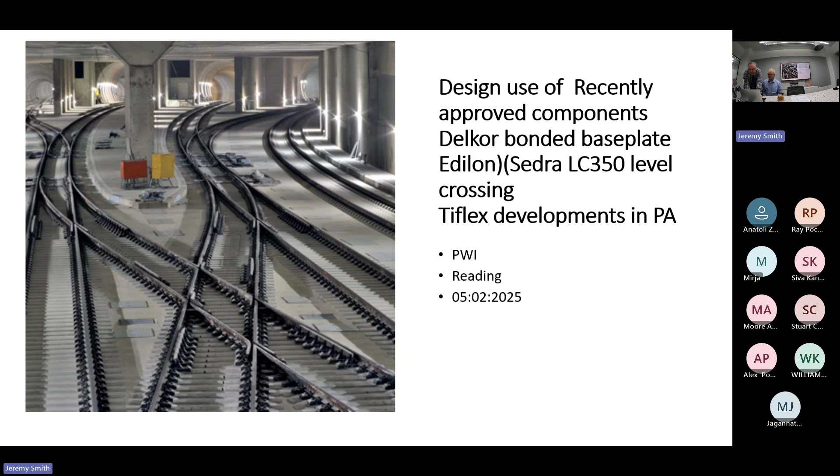What is going on? I'm running from there. We just won't move on. What the devil's happened here?

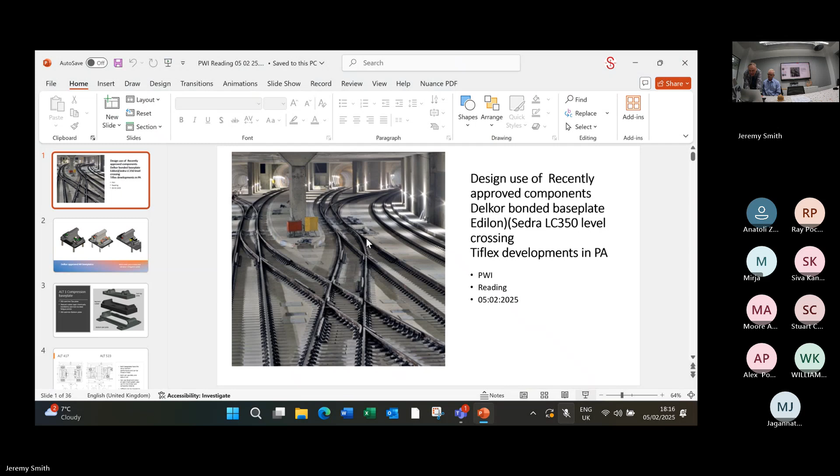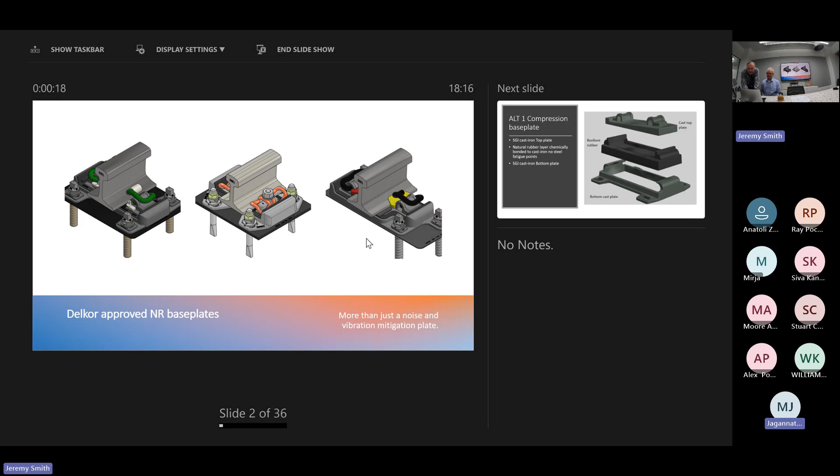Good, right. We're leaving it like that on that one, are we? Sorry? Is that going out like that? Jeremy, select the display settings on the top. You should be able to see duplicate slideshow. Yeah. We both see the same thing now. Yeah. Oh, thank you, well done. Thank you for that, cheers. No worries.

Right, for my pains I got dragged into getting Delkor approved on Network Rail, which I've managed to get 4 base plates through, one on the bullet version, so I'm not going to talk about that too much, but there is one available out there if you need it.

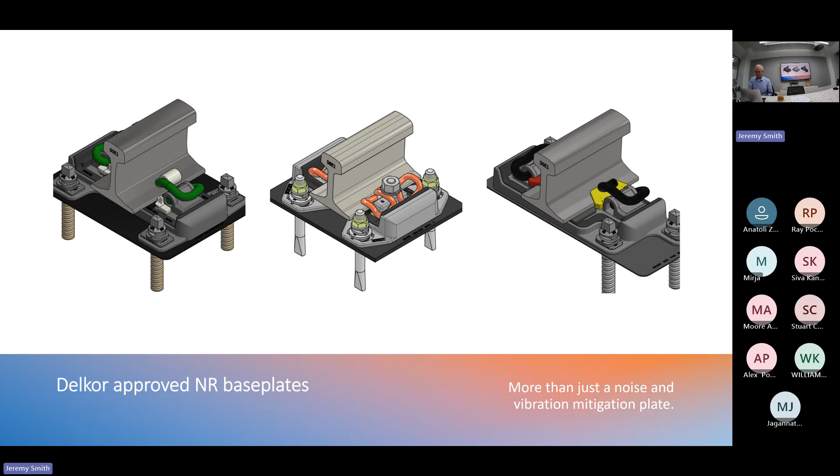So there's 3 types here which we've got in: one for sleepers, one for long timbers, and one for slab track. I'll eventually go through them as we go. There are 2 types of base plates.

The one I'll talk about mainly is the ALT 1 compression plate. I've got a slide on the high attenuation one which I'll explain later. But basically the principle of these things is you've got 2 bits of cast iron - the cast top plate and the bottom cast plate. They're put into a jig, and then high injection rubber at a design resilience is pumped into the system, and they're chemically bonded together. So effectively you've got the same as a bridge bearing seal on those, very durable.

I think LU have managed to break a couple, but apart from that, there were a few issues which compounded the forces it was seeing. Let me put it that way.

So these have been around for probably 25-30 years. Been used extensively in Asia because of the patent issue in Europe. I was instigated to bring them over into LU when we had the track form issues. I think they've been in LU probably 10 years now. There's about 18 kilometres of these in track of various forms, apart from a couple of check curves. Automatic train operations has caused a few problems, but apart from that, they're all performing really well.

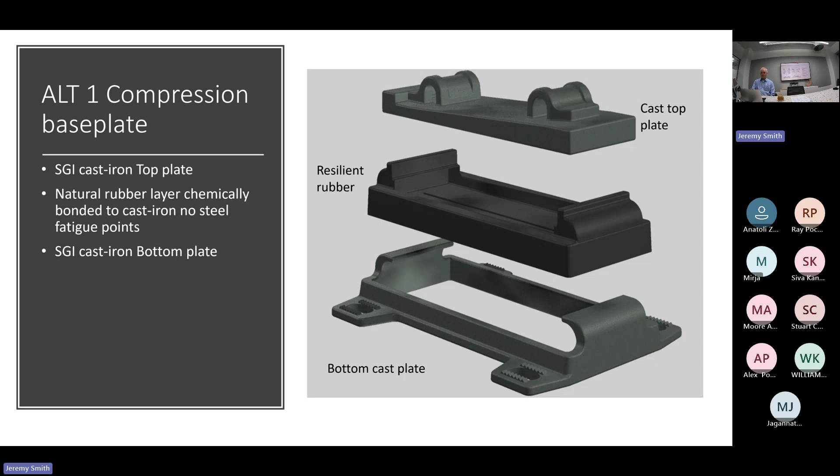They work up to 125 miles an hour. We've had them on 40-ton axle loads in Australia, down to light rail, and we engineer the rubber for the operation requirements. The two core plates are basically the 417, which is a slab track one, and the 523 that fits on a sleeper. They're both identical, you can mix and match them. So if you're in slab track and you've got something you need to get round, you can just swap over to the 523. They're dual seat, so you can put 56 or 60 E1/2 rail in. You can fit them on dowel, screw or cast-in bolts, and whatever.

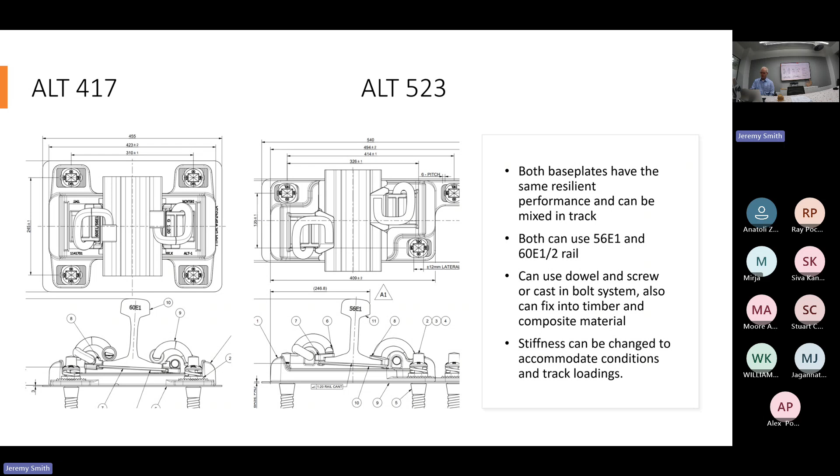So the way we work it is we get the operator's requirements, the loading on the axle, speed, etc., and just make a compound up for what they want. We specify three ranges mainly, which I'll go into, but we can work in between there. It's a computer change in the mixing of the rubber, so it's a no-cost change.

The latest one we've done, because what we found is with long timbers changing to FFU, is that the bending moments on the screw is getting shortened because you've got a lot stiffer medium there. So before in timber, you get a bending moment on the screw, probably about 1.5 inches or so. With the tighter media of the FFU, that has shrunk drastically.

With the FFU lasting longer, what we're starting to see in Asia is failure of bolts at the interface, very slight lateral movement, purely because you're not seeing more movement, but you're seeing more concentrated stresses in a smaller area, and you're also having an item that's lasting a lot longer.

So what we're looking at, we've tried this on LU, and this is on Network Rail where we're doing it. We made this plate especially up for narrowness to try and improve the life. I'll go into lateral resilience, but the lateral resilience takes the forces out, so that damps down the lateral forces. It's been very successful in Singapore and Hong Kong, increasing the life of the assets and reducing maintenance.

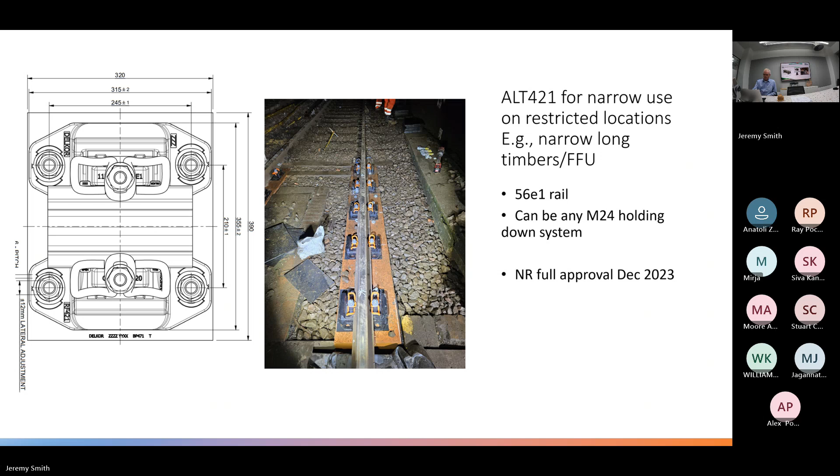Right, I'll briefly touch on the egg. It's used on LU extensively. Network Rail, we've toyed with the idea of putting on Network Rail. The trouble is the egg is a very soft base plate.

The Euro norms do not accommodate testing of soft base plates. When you test a soft resilient fastener, as we did in LU, you have to go back to the old DIN methodology where you put a row of base plates in, because a singular base plate or two together with double loading on there will give so much deflection that, and the speed of the cycles mean that after time it heats up and you end up with very slight tear failures, which, although they're not structurally damaging to the plate, it means they fail straight away.

If you put in a long line and you put an overload situation in there, the rail bends as a beam both laterally and longitudinally, and the forces disperse down the railway system. So this plate will never actually see that peak load from the wheel rail interface.

But at the moment, I'm struggling with getting things through that completely comply with Euro norms, and the thought of going into something that doesn't comply to any Euro norms and taking it through, I'm afraid, as a collective between myself and the suppliers and designers, we've decided that the cost return is not sufficient to take this forward.

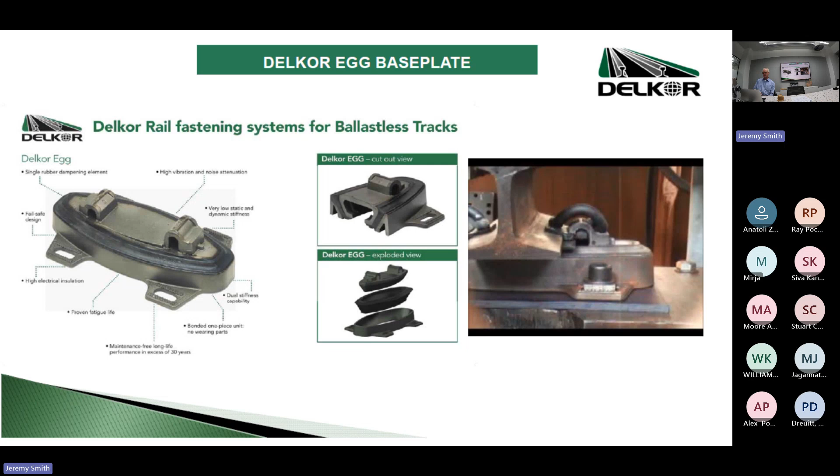Basics, noise and vibration. Resilience, we obviously use. One of our things is noise and vibration. I'm not going to go into it much, but just to give you an idea of how it radiates.

The all resilient systems will look at low frequency vibration. So wheel squeal, etc., they tend not to have a great deal of benefit, but it's a ground-borne noise. So from your tunnels going into the ground, they radiate into the clay, etc., or if there's concrete structures, they radiate through them. They then hit the foundations, go into the building, and the building rooms then act as a microphone, which then sort of spreads the noise, and that's where you get that low rumbling noise.

Planning now has jumped on this after Crossrail because they had a field day, so now it's coming in drastically. We've got to look at noise and vibration on there. Just touched on it because it will keep coming up, and this picture, it just gives you an idea of where we're going.

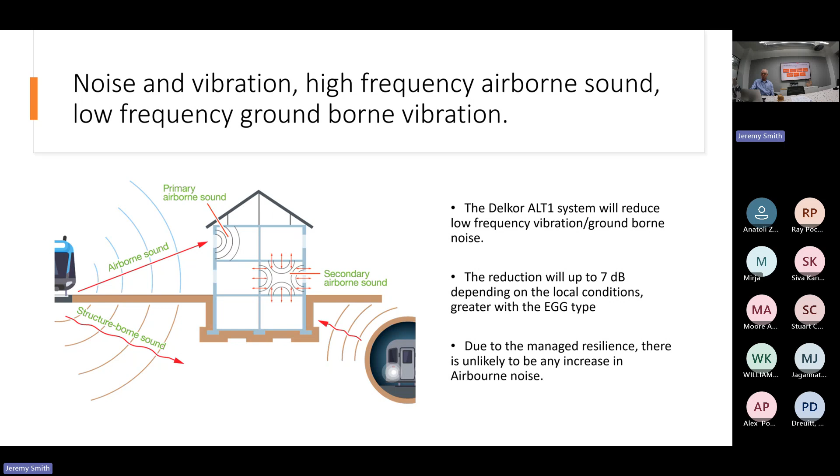Resilience has been something I had a very fast learning curve on. One thing we all tend to get trapped into is thinking that resilience is managing the forces vertically. It's not. It doesn't work unless you laterally get your resilience as well.

A stiff lateral track will cause more damage on curves than anything. The combination of having soft in one direction and stiff in the other is a disaster where you get any minor flange contact. And I've got the scars to prove it.

So all the systems, if you've got a toolbox of items, and if you're on curves, you need to make sure you understand how your lateral forces perform and how you're going to manage that. Without that, there's been some very classic places where there are major issues.

I won't mention any names in case somebody calls me over the coals. We've always treated lateral as a minor thing.

The other thing is we're great for putting down pads, and then you get a bolt on there and somebody on a jackhammer tightens it down, squashes the resilience out of it completely. So the resilience does nothing. By the time you get to the resilient area, you've squeezed the first half of the life out of it, and then it can't do anything.

Even if it's set up properly, you don't get that same effect, because having no preload on a system when a train comes to it, the initial vibration hits it and it absorbs straight away rather than going into it.

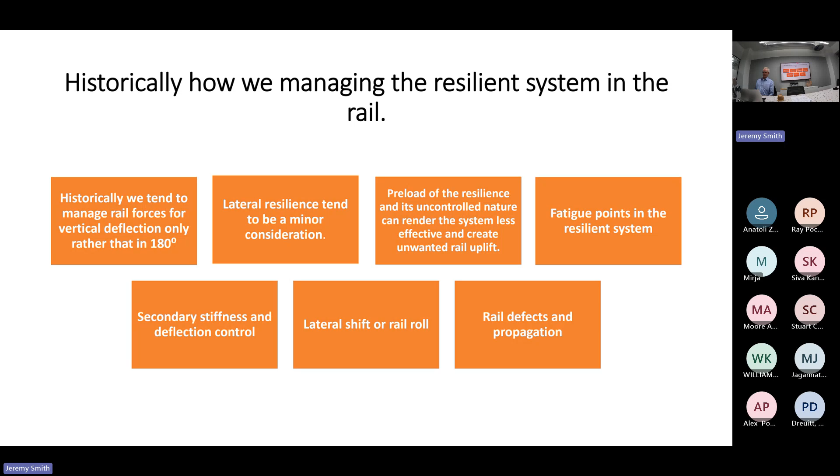That one is a minefield. We're well behind on resilient platforms. Some behave a lot better than others, and I will touch on it later.

These are the classic issues. This is an extreme issue. On a light rail system, they put the classic setup: a grout pad, a resilient pad, going up into a bolted system, with quite light loads, about 8 to 10 ton loads.

Over time, the bolt has started to rattle. It's fatigued on top, started to break the grout pad up, and the bolts are starting to break. So you've also got fatigue in the clip, and the whole track form is basically going. That will unzip as you go along, so once you've got a weak spot, it will just slowly go down.

So is that a rigid grout? There's a grout pad, and then in the middle, between there and there, there was a 20 mil soft pad. On the DLR, all the track forms of this type are on the danger list now for replacement, and it's not an old system.

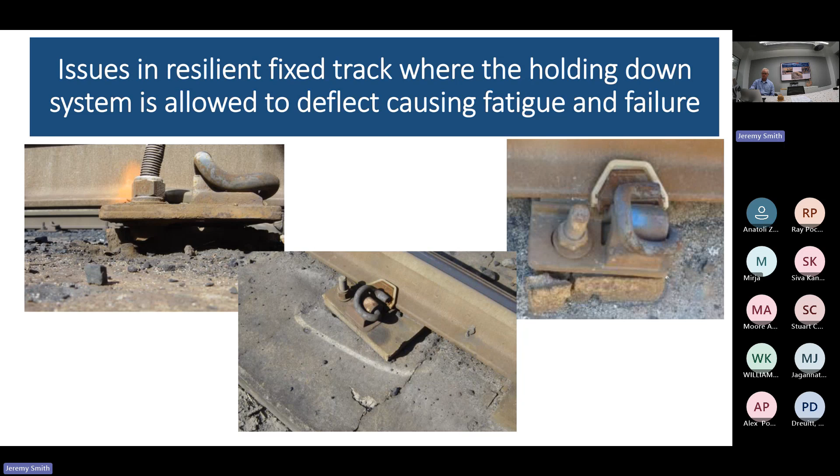Just to give you some idea of noise and vibration performance, it's one of these things that's a black art, cutting it down to basics. I'm not going to say these are absolute figures, but it obviously depends on the ground-carrying conditions.

A direct fixation, which is a cast iron plate on concrete, you're looking at 3 or 4 dB. Embedded rail, that's your Edilon type thing, typical tramway system, that's 6 dB.

Resilient casting base plates, that's the ALT1, up to about 10 dB. Booted system, the LVT, up to about 10, but that on curves doesn't quite work as well. The egg system, which I talked about earlier, I've got down to about 18, but nominally looking at 14 is what we say is a maximum.

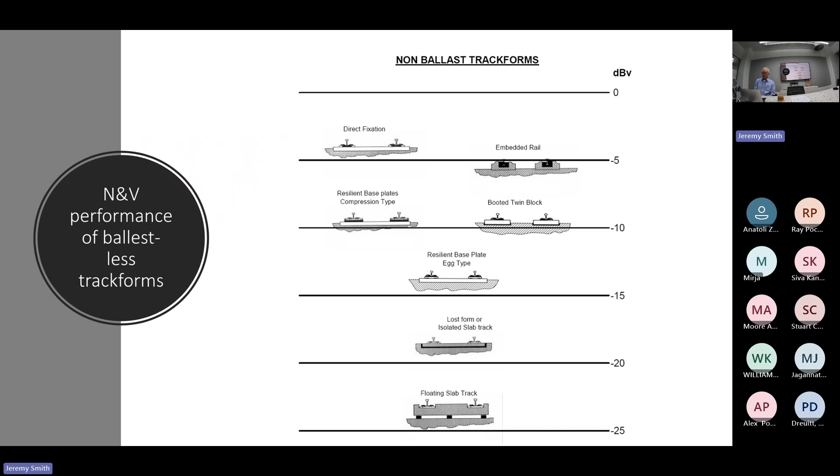And then you go onto your floating slab track, so effectively a ballast mat under, you're getting down to 20, and then full floating slab track you get about 25. So really the Delkor egg is probably the best you're going to get without going to expensive floating slab track, and then you've got the LBT and the Delkor alt 1 following on behind. With technology we're fine tuning that and getting improvements, but for a basic rule of thumb, that's about where we are.

So this is the ALT1. The graph is showing rail deflection. The blue line is static, the green line is dynamic, and the red is fault mode - effectively an overload situation, so that's the maximum it will be. I forgot to put the scales in, but the maximum deflection on this one is 3 millimeters. This is what you'd typically see for a 17.5 ton axle load at 125 mile an hour, so it's quite an onerous input.

Personally, I don't like deflection going above 3 millimeters - I think we're getting into dangerous territory after that. Everything in the UK, I specify that 3 mil is the maximum, because you can get secondary oscillation if you're not careful.

On the left-hand side shows you the dB reductions we're getting for that train at that speed. So you can see when we get down to 80 to 100 Hz, we're getting a significant reduction in ground-borne vibration. And once you get above 50 or 60, you're starting to get into the zone where the wavelength doesn't affect the ground, so it's getting more enjoyable and stuff.

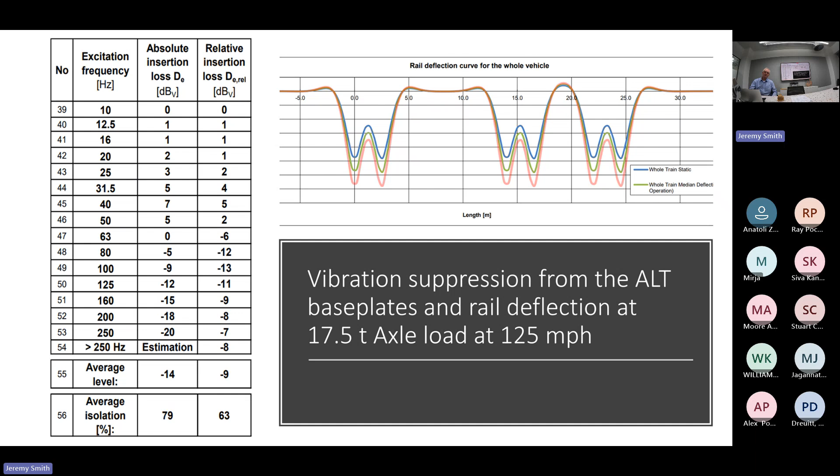So all these lovely old pictures from years ago, you used to see a heavy loco with a bow wave in front - you don't get that scenario. If you go back to the previous slide, you can see the uplift is probably about 0.01 of a millimeter, which is effectively the uplift caused by the weight of the rail resting on the pad.

So that is laterally as well - effectively, the whole rail bends, so the rail deflection length is increased significantly. The rubber is natural rubber, so it stiffens with age. So as you get towards the end of asset life, you're not going to get this floppy bit of rubber in the chair - it stiffens up, so although it doesn't perform and give you the NV or fatigue reduction in the system, you're not in a case where you're getting into any danger. All you're doing is wearing your asset out quicker.

Everything has been designed to use existing tooling and skills. All the clever bits we do in the factory, so as far as the guys on track are concerned, it's a base plate that screws into something - end of story. We don't want any whizzy stuff down there, we just want it to go on there and they plonk it in.

40 years traffic, high N&V performance. And the other good thing - existing spatially constrained railways, London Underground typically - unless you've got a real, dare I say, pig of a railway, it will fit in most places and work pretty well.

DLR, they're on a night shift, which is 3 hours. They're changing 20 base plates a night, drilling and grouting. So it can be done quite economically as well.

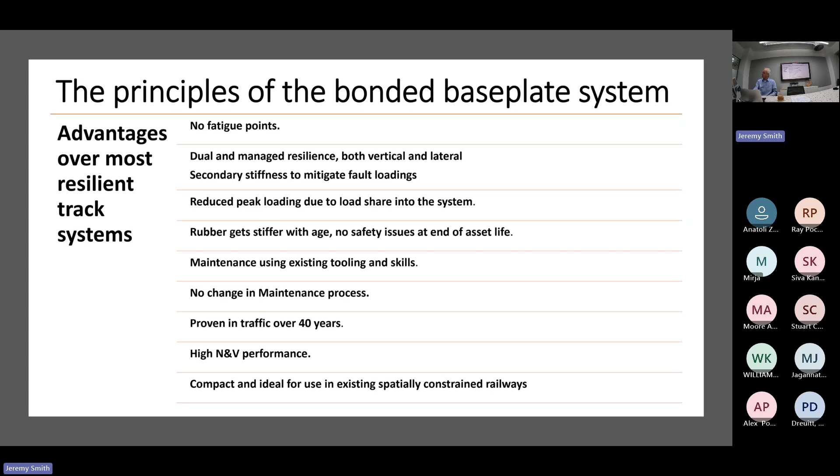Where's that? Is that on the viaduct? Sorry - the viaducts, yeah.

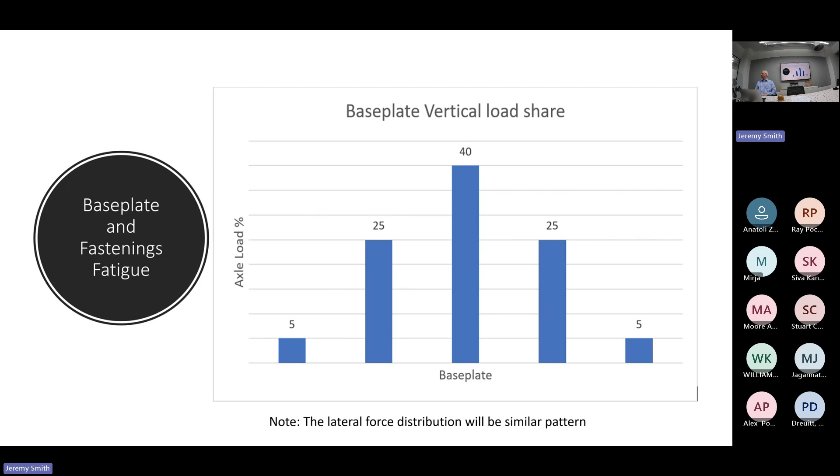Again, this is more of a summary. Vertical forces.

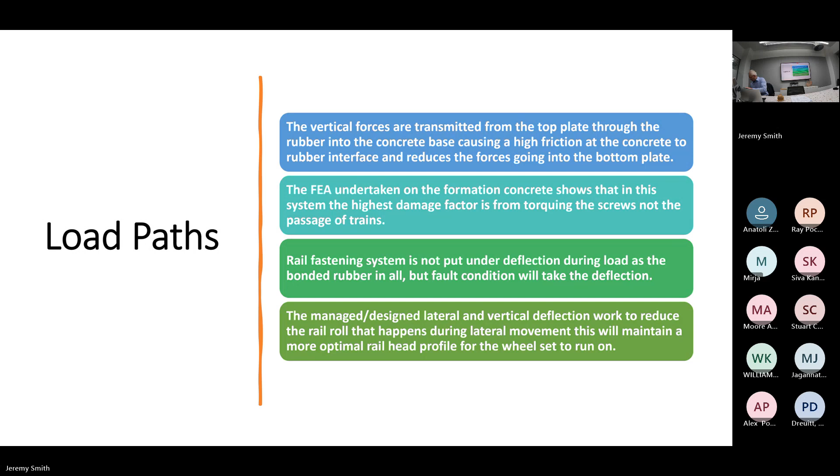Railhead damage. We did some testing on DLR because we've just done a check plate for them with a Delkor, and the vibration reduction on the high frequencies, which tends to cause corrugation and propagation, was slightly reduced over what it was. So we're not going to increase the corrugation. We've had some issues with corrugation on London Underground.

We're still doing major investigation on it, along with the damaged base plates which I mentioned. It does seem to correspond with ATO, ATP, automatic train operation. Although we've got no evidence and we're still working with LU on it, we do feel that probably the total consistency of driving now is a big issue in not breaking the cycle up. Having a driver who drove faster, slower, or stopped slightly before a signal was enough to break that cycle up.

It's something that's ongoing. We had the first track I put in there with the egg, it slowed down the corrugation. And since ATO, ATP, it's now sped up to worse than it was. So it's pointing in that direction, but cards on the table, we're looking into it. Anything we can do to try and reduce that, we will. So we're doing development work, looking to see if we can work with LU to reduce that issue. Everywhere else, touch wood, where it is, we seem to be okay.

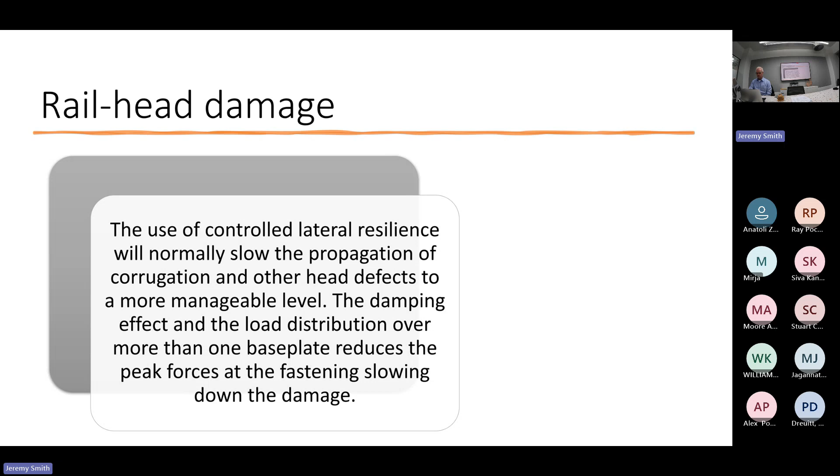Right, going on to other things related to systems design. So, stiffness transitions. Been a bee in my bonnet for donkey's years. Why do we dig a big hole and chuck a massive great lump of concrete in there to stop the formation being pummeled to death? Instead of that, we pummel the ballast to death. Whereas my background in engineering, I've always worked to try and reduce or ease the forces off.

This was done by a colleague of mine, Peter Stronstein, who tried it in Sydney in 2004, effectively running off the slab on resilience. And then you've still got obviously the momentum of the movement of the rail, and then you come off it onto Delcors on the ballast, and then you slowly stiffen up the rubber.

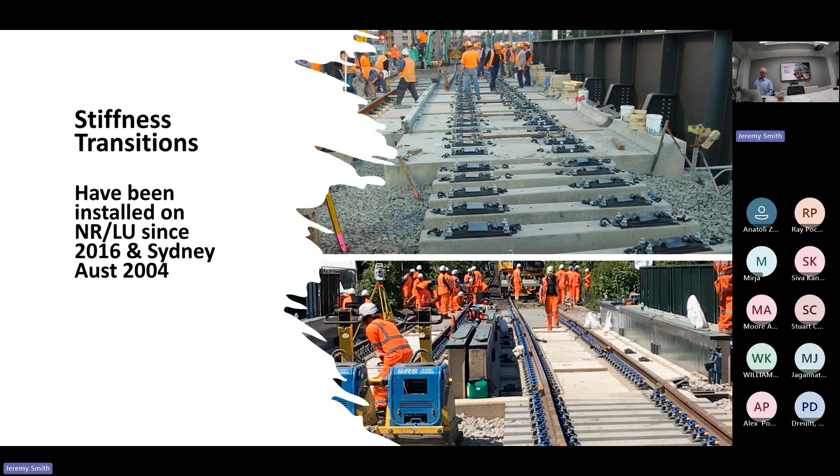As you can see on that bottom one, which I'll show you a bit further, in the dim and distance, you can see the change in the base plates going to green. Well, that's the different stiffness. Hopefully I remember the graphing. This is the first ones we tried, LU, which has become the standard drawing now. So you can see you come off the concrete slab onto the wider sleepers with the Delcors on at spacing, and then halfway down you change to the green ones.

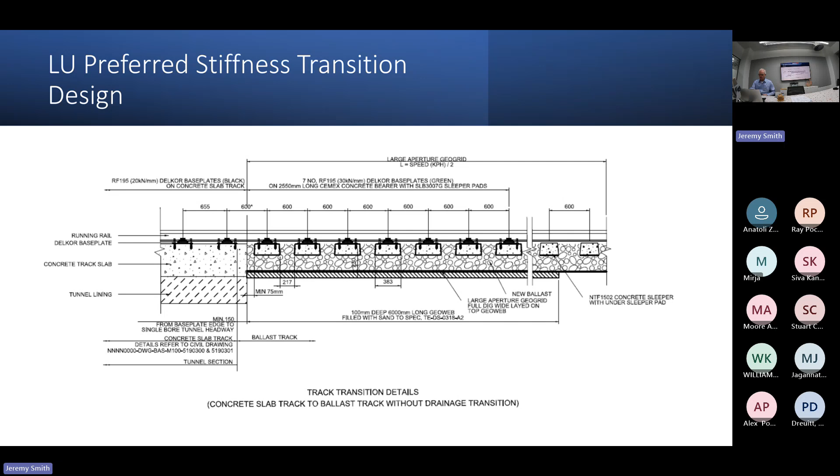Again, we don't have to change every single base plate, because using a rail as a beam means that as the rail bend comes along, it picks up the stiffer one and slowly stiffens the rail up as you go along. So you'll have, say, 10 sleepers interacting with all of them, then it'll be 9, one slightly stiffer, so that makes the rail stiffen up slowly. So rather than having every single one different, you can actually use it by rolling the rail stiffness down along and clipping along. It's a bit of a hard concept to take forward, but I think I've got some graphs further on.

Right, that was just a recap, and I've probably already said all that. The brilliant thing about this is, it's not intrusive works - you haven't got to dig a big hole, you're just putting in bigger sleepers in a different configuration. All the movement is kept out of the ballast. And one thing you've got to remember is that movement, again, is not only force going down, it's lateral movement.

So what we found was that if you did it on something like, you came off a lateral resilient system onto a padded system with a soft pad to do it, what you was getting as you came off was the track would be moving slightly because you'd got lateral resilience in the system. So very slight movement, only 0.2 of a millimetre. That was rolling into contact points at the ballast slightly and just knocking all the cohesive bonding off the ballast. So it's ending up with that critical layer of ballast underneath the sleeper having lost its cohesive bonding, and you ended up with marbles there.

The tamper comes along, hits it, and they spew out everywhere. So by also managing the lateral resilience as you come out, it gives you a way of increasing the ballast life. The aim of this was to make sure that the transition life was equal to or greater than the life of the track it was running into, the ballast track it was running into. So the idea is that we reduce the maintenance interventions completely and reduce the risk of twist errors, etc.

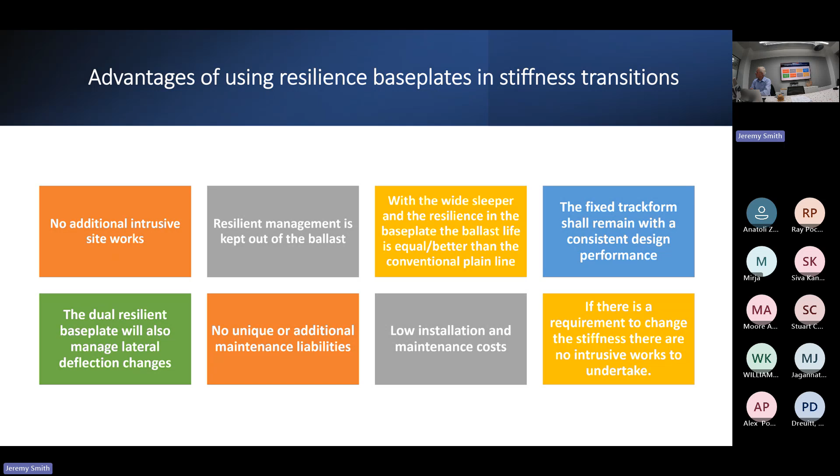Done that one. Low installation costs. So basically, it's the same. You know, if you're coming off the end of a slab, you've got to replace the last panel, so the costs are basically minimal. And potentially, if there's a change in stiffness with the vehicles, you just unbolt and rebolt different ones on.

These are a couple we've done. That's the first one I installed, 9 years ago. That was on the Met line. That hasn't been follow-up tamped. It was supposed to have been done, but never did, and it hadn't moved. That's coming off 20 kilonewtons onto 30 kilonewtons. And the other one is in Kent, on Stour Bridge I think it is. That's 80 mile an hour running, coming off a newly installed concrete bridge. And in the distance, again, you can just see the change.

The network rail one was a test site. We've done a lot of testing on deflection, what it's doing, and it's performing, luckily, as I designed.

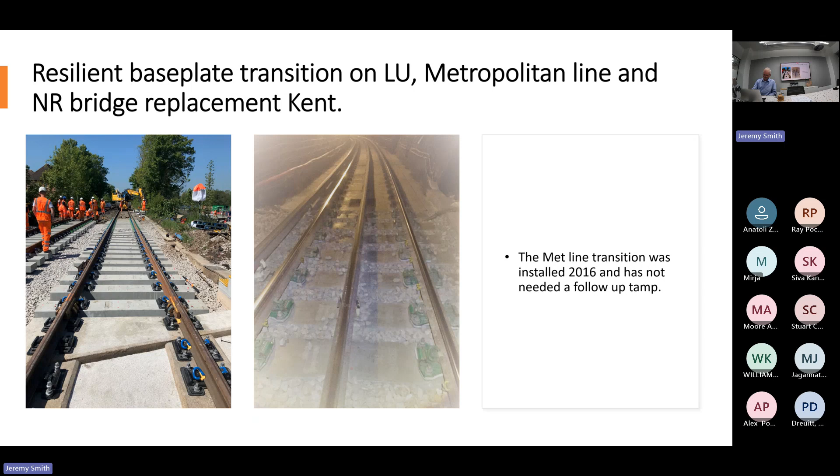Long timbers. I've gone on about FFU and side cut, etc., about the fatigue.

The one on the Sydney Harbour Bridge was done 25 years ago. That was done to try and stop the vibration going into the bridge and upsetting the neighbours at each end. It worked really well - the timbers actually failed before the Delcors did.

There's a major upgrade on rolling stock going on now, so they're replacing the timbers, and that's the only reason they're coming out. The middle one is Norwood Viaduct - that was the first one we tried. It's going onto conventional hardwood. Again, Sussex did some testing on it, and it's performing as required.

And the other one is on FFU. That was done on a heritage railway for testing. I'll show you the video at the end of resilient track form, how it works. I won't stress somebody out at the moment for changing the slides over.

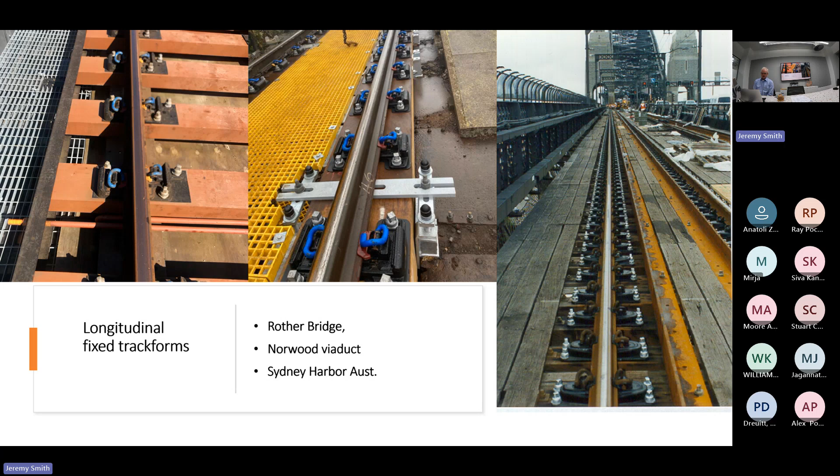Again, that's working really well. I'm trying to get more people interested in using the Delkors with the FFUs, but with the cost restraints going on, the bean counters seem to be stopping a lot of enhancements that would give maintenance a big benefit.

Delkor and FFU is quite a good solution - quite a good solution. In their view, they've done probably 15, 20 bridges, I think. We've done some on Network Rail, we're doing some more, but it's hard work getting the word out there now.

This again is a wrap up of more stuff I've said about the resilience. We went from - in the old days when I first started - using marine softwood long timbers, which was beautiful timber, worked a treat, used to be really forgiving, really good. Then we went to hardwood, and now we've gone to these composite ones, which are brilliant, but how far off we are from putting a lump of concrete in, I don't know.

The newer materials basically have no meaningful resilience. They can engineer it in, but very rarely do they. It's pretty expensive stuff in its own right, and as soon as you start modifying it, the price goes through the roof again. So especially on minor curves etc., you will see lateral failures in about 15 years' time.

I don't know anybody who's been involved with long timbers who hasn't got a sob story about them - how they've failed, how they've had a derailment, how gauge widening panics happened, this, that and the other. It's a very high maintenance liability area, so by putting the resilience in, you reduce that liability.

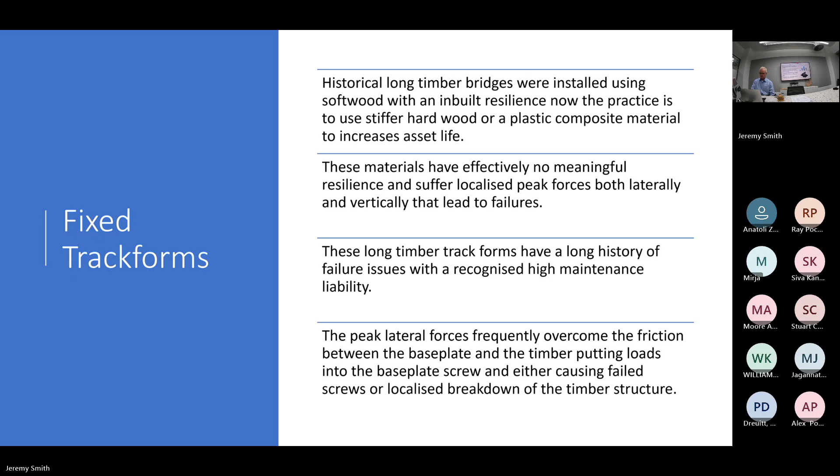This has a great benefit. I've done it quite a lot in the States and Canada, where they've actually taken the timber off, jacked the bridge up, replaced the bearings with grout, and then put a bearing on top. So we've lifted the whole lot up 300 mil, bolted the bolts back onto the existing structure, and gained ourselves 300 mil clearance.

Also with John at the moment, we're working in some areas with flooding - we're putting it on top of the bridge so we can maximise the flood opening in all directions. If you've got the resilience in the system, the timber is always left on there, and FFU is deemed to be a timber replacement. But if you build the resilience into something else, why do you need that timber? Why do you need that extra interface, that extra set of bolts, that extra medium? What benefit is it giving us?

I know it means you've got to work with civils guys - well, I might work with civils guys. What's wrong with that? What's the thickness of the resilience between that base plate and the top of the flange?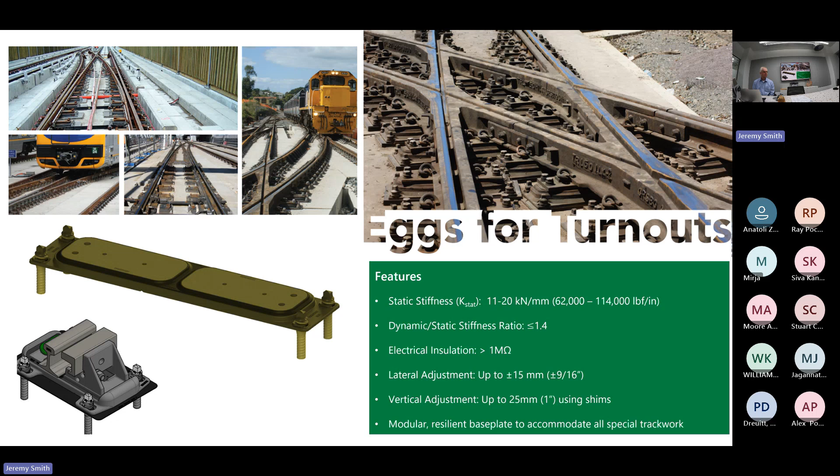Right, we're moving off that for the moment and talking about embedded rail. I got involved in this basically for the approvals. It had been approved for a long time on Network Rail in its old form, which was a massive, great lump of concrete about 550 mil deep. It wasn't viable to put in because you hit services every time. So it was redesigned down to 350 deep, top of concrete to bottom, and went back through the approval process. It got stuck in product approval - the only change was the concrete, performance was identical, and it took 3.5 years to get through. So I dragged it through the last bit.

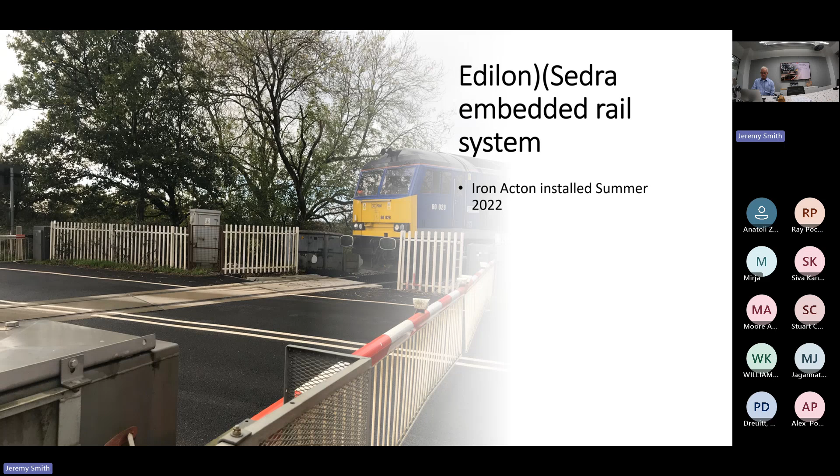So effectively, what you've got is concrete sections - that's the grey bit - and then you've got what is basically a conventional formation underneath it. So you've got type 1 and then a sand binding layer, the reinforced concrete with the rough grip surface on it, and then you bond it in - you can see the rails there are bonded in with a chemically bonded Corkelast. Again, that resilience is built up by user requirements. Here's one I bought earlier.

So effectively, what you've got here is, assume that's concrete edge, you prime the concrete edges, work out your final level, so you're always going to have a level differentiation when you put these in. That's your final. You've got a resilient layer there, that's your inclination, and you put packers in there either way.

It doesn't show up very well, although you can see it on the slide a lot better. You've got Corkelast wedges, which is the same material that you put it in. You've got round the outside these void fillers, which effectively just save the material. That's where your money comes in, is that material.

So they put these fillers in there, and they have a racking system, which means that as you get your final level, you just tap these wedges in, and that gets your correct alignment. As you can see, apart from strategic places where you put these pads in, it's free under there. So you fill up one side, it flows under, back out, levels up, and then you top up to get your level, sets off.

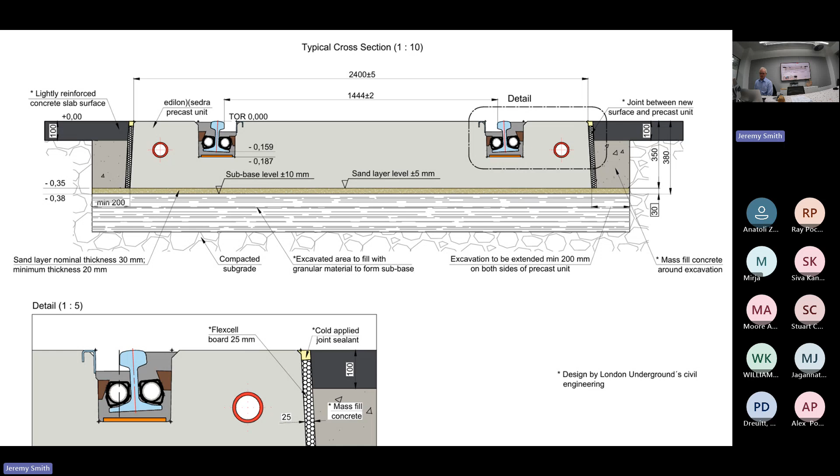I've done a cost benefit analysis of it with Network Rail, using Network Rail figures, but it costs 10% more to put in, but that pays back within the first 2 years.

And again, we put stiffness transitions on this, and we've taken a place at Newhaven, which is a test site where they were going in every 3 months to restore line and level. We haven't touched it since. And that was start of COVID. So it works really well.

So on level crossings, yes, level crossings, and obviously the same principle on things like tramways, but also, you know, we do pits as well, and they're brilliant for pits because you have a cut off down there, so your Corkelast will come along up there. You put a temporary former there on the edge of the pit, so your pit can finish at the edge of the railway. You take all your sharp edges out.

Cleaning is easy, no corrosion issues. Yeah, you get an extra 300 mil on your pit, and you also take away all your knuckle backers. Works really well.

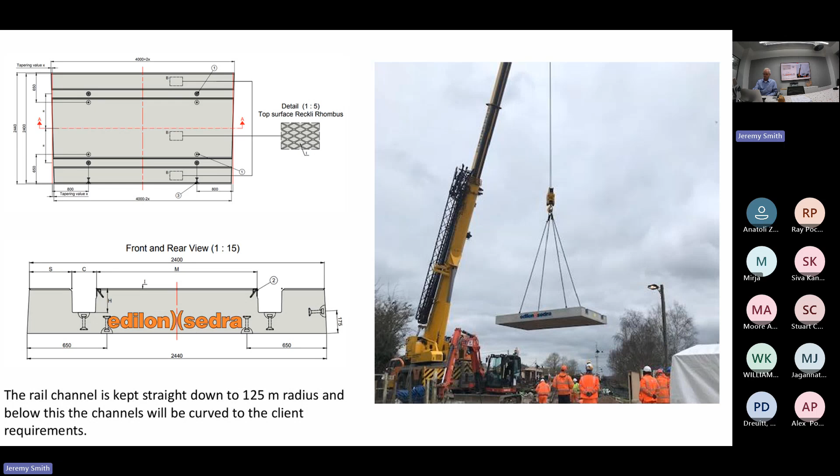So there's a sort of breakdown of it, easier. You can see we've also got it approved for a check rail system. So we've got a tight curve, which again, that project's been delayed about 8 years now, I think, which has got a check rail in it. So we designed a block system so you could embed the check rail around there without a break. Obviously a bit more costly and quite interesting, making sure you get the bolts in the right place when you curve around. But it's doable.

We assume 40-year minimum asset life. That's worst case scenario - it's always road transport that kills it. But basically the stuff that's in Holland, it's on very poor ground conditions, has been in there 40 years and not showing any sign of degradation.

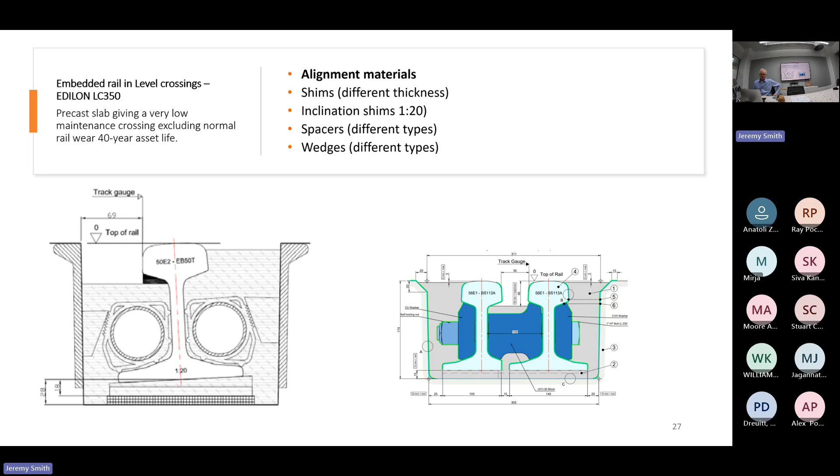Rail replacement, hopefully I'll put a slide in. Yes, I do. Rail replacement is done. As you can see on the base, you've got pad there that is not bonded - so that's not bonded to the concrete. So you've got the big pizza cutter, which you put down the side and then just lift the rail out, clean it all up. You don't have to clean the material off because it will bond to itself quite happily. Just take all the degradation out of it, rebond it back in again, and in you go. So that's a nighttime closure to do it.

What's the curing time? Curing time for works vehicles, depending on temperature, is maximum of 1.5 hours, about 3-4 hours for full line speed. So yeah, it's not an issue because by the time you've repaired any bits and pieces on the road and got your track back, it's fine.

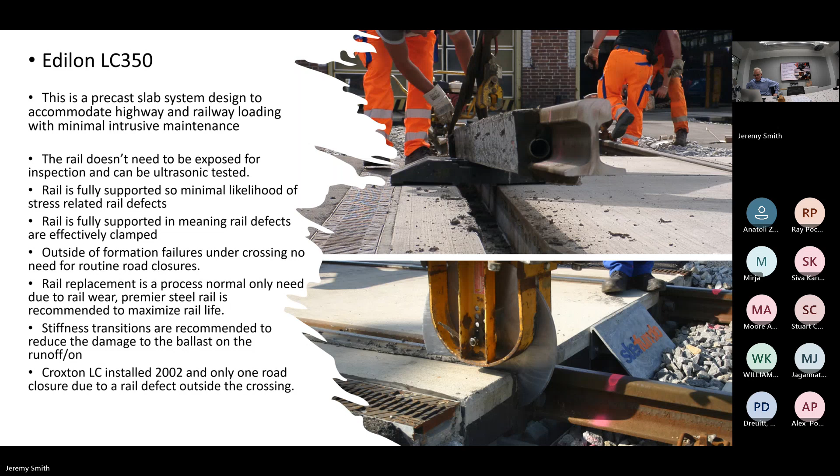The other thing - I'm doing quite a bit of work on the continent where they're doing electrification, etc. We're putting these underneath bridges to save strengthening up the foundation. So if you look on the left-hand side, a conventional ballasted track - assuming your formation is good enough for ballasted track, then effectively you can rip the ballast off, put a binding layer down, set your slabs in, and drop yourself about, let's say, 360 millimeters without any major works. And because you're at bottom of formation level, your drainage, should, if it's effective now, it should remain effective. It's an easy, cheap way of doing it. I wouldn't recommend it for extensive long runs because obviously changing rails is always going to be a liability compared with that. But for small, 20-30 meter bridges that you want to lower under, it's not the end all.

It's not going to be used everywhere, but it's definitely something that I think should be in the toolbox that we can use.

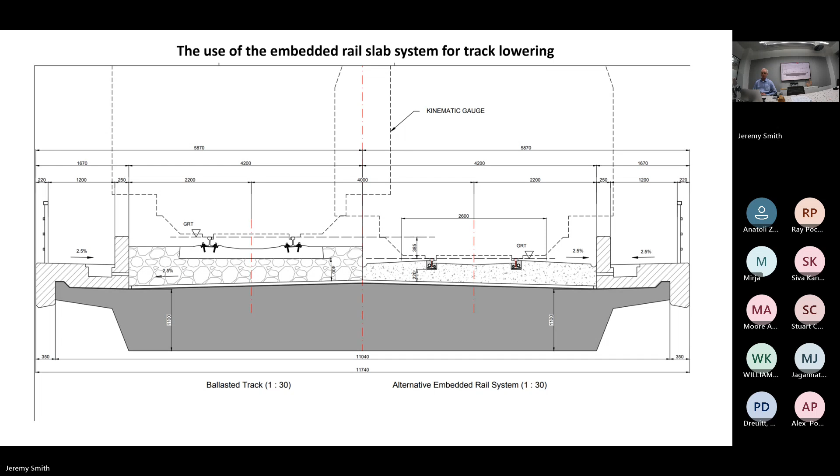And this is where my systems engineering sort of comes in. Luckily, Edilon, Sedra and Tiflex, Delkor, are sister companies who don't get on very well together, and I was brought in by the parent company to try and rattle some knuckles and get them working as a unit.

Every one we put in, nobody's said anything about them. Everything we've gone and tested and revisited afterwards is performing well. So the proof to me is when nobody complains. When somebody complains, you can go and sort it out. When nobody comes back to you, it's generally working. The Newhaven one, the Swineshead one, were done in very poor conditions and they're behaving well.

The crossing itself at Swineshead had a few issues, but that's basically down to ground conditions, and there's still a few hiccups going on there which need to iron out. But the Newhaven one, which again is on marine alluvium, we dug out 500 millimeters of type 1 binding layer, put it in there, and after 2 years of TRC trace, you couldn't notice the difference from day one to the end of it. So it has worked, in those conditions, and the maintainer's made up with it. It just doesn't go back there like he used to.

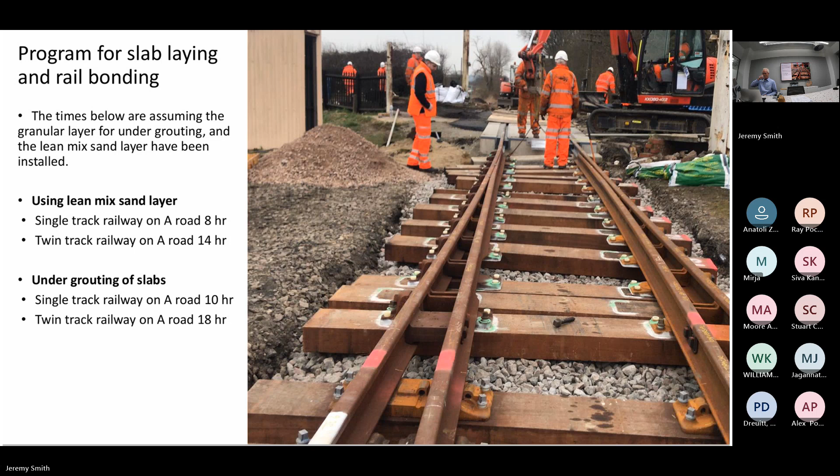I'm also doing some work on high frequency damping. So the classic damper is a big lump of rubber on the outside, generally layered. It tends to sort of try and burn a bit off. It hasn't been that successful.

So there's a guy in Hong Kong, and there's myself and a few other guys who are working on the system. And what we're looking at is making sure that we can take, again, it comes down to this, utilising every direction. The conventional ones, effectively, anything radiating out from the web at 90 degrees can be captured. Anything coming out anywhere else tends not to be. So what you have here is the white bit in the middle is a weight, and then 2 bits on the outside are cartridge. Sandwiched in between there is a layer of polymer, and that polymer is aligned to the weight of the white bit in the middle.

And that then effectively works like white noise. What do you call it? Is it white noise? Where you get 2 amplitudes, oppose them opposite each other, and drive them in. So effectively, you damp it down by burning the energy off, by reversing the amplitude as it goes in there.

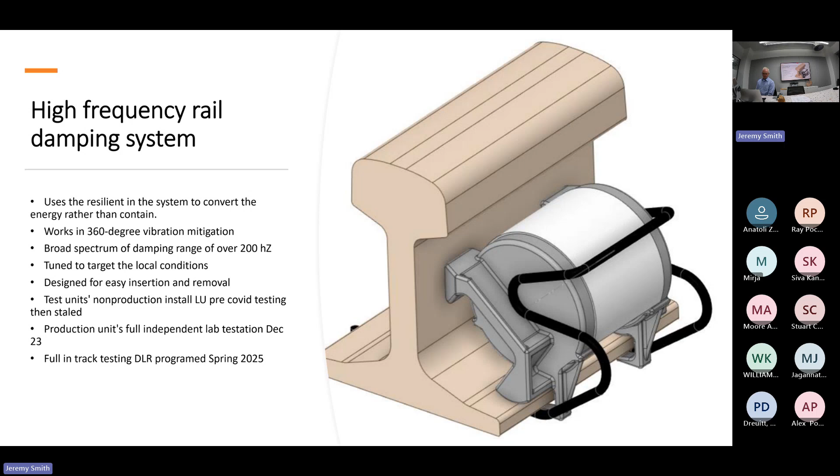We've done all the pre-production testing. It works well. We've got a site going in on DLR, hopefully in April time. This is aimed at high frequency noise. We're aiming in the 200 to 800 hertz mark, which is where corrugation is prevalent. So we're picking a corrugation site to actually monitor the reduction in corrugation. They're easy to fit, as you can see. They're a spring system, clip on really easy. Hopefully, if somebody asks me back in a year's time, I can give them some results.

Do you think they might do something about in-car noise as well? In-car noise, it will reduce in-car noise by default, by effectively the fact you're not increasing. High frequency will be lower, but also the corrugation, which is rail roughness, is a major input into in-car noise. It will reduce that or slow it down.

I'm not going to say this is going to kill corrugation off. It won't kill it, but it will make it more manageable. Reduce the frequency of rail head treatment. So what they do in Hong Kong with this is they actually put it in the areas where they get corrugation, which then slows the corrugation down to the same rate as a plain line. That means that they can program in linear grinding rather than going in, hopping about all over the place, doing emergency works. The other thing I'm working on at the moment is the Austroroll, which is effectively a competitor to Schwihag.

They're not looking to take the Schwihag market on new build. Basically, this is retrofit—they're very, very easy to retrofit. I can do one in about 2 hours on site. You don't have to move anything of the point work.

So it's effectively unbolt bits, screw them back down again, tension up, put a preload on there. As you can see from the video, that's actually working, which surprises me. When the switch goes along, you also get an uplift from the roller, which also helps on getting your residual opening down, especially on the end of the planing. I did some tests again with Darren on the switch, and we managed to get it to work on a hand point and get it compliant.

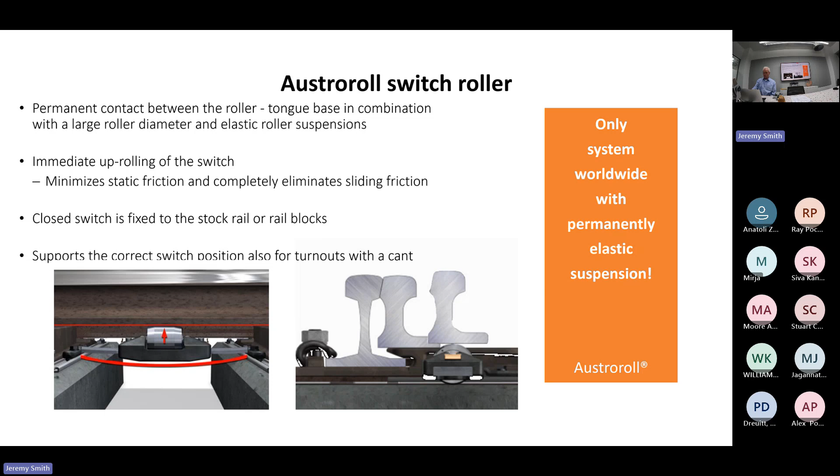Let's go through the thing. Retrofitting is probably where it's going to be big in the UK. There's nothing—you change nothing on the point work, and theoretically you don't need signalling input. All types of sleepers: concrete, steel, timber, etc.

We've designed it to fit on the resilient system, so it fits topside the resilience, so that it's not affected by the deflection caused by the train. Rail profiles, you can use anything. On the continent, it's on high speed, 35-ton axle loads. If you get a run through, it won't put anything in fatigue, so it's completely usable.

I've actually put it in on spring points on LU, and they're running through because the train drivers won't get out of their cabs—they're running through with train moves. It's been there for 4 years, nobody's touched it yet.

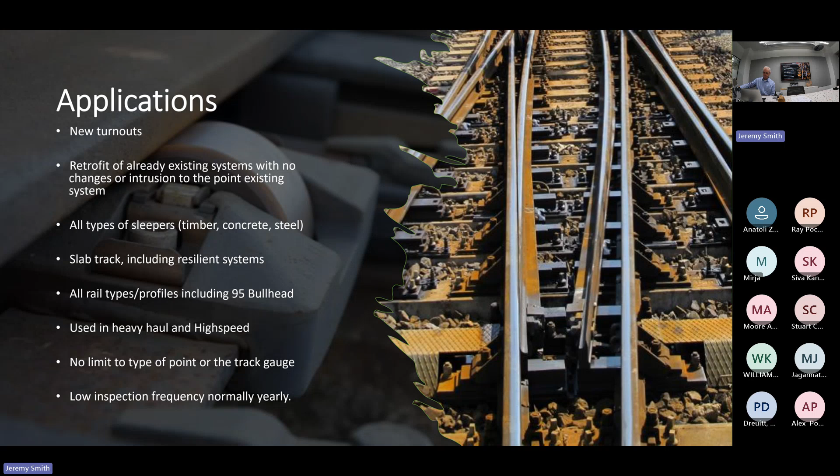Normal inspection is yearly, so it's low impact. This is one in Germany—it's in a steel mill. It's been in for 15 years like this. Extremely good bearings—it's a bearing company, not a rail company, and it's worked in that environment for that long, and it's still performing perfectly okay.

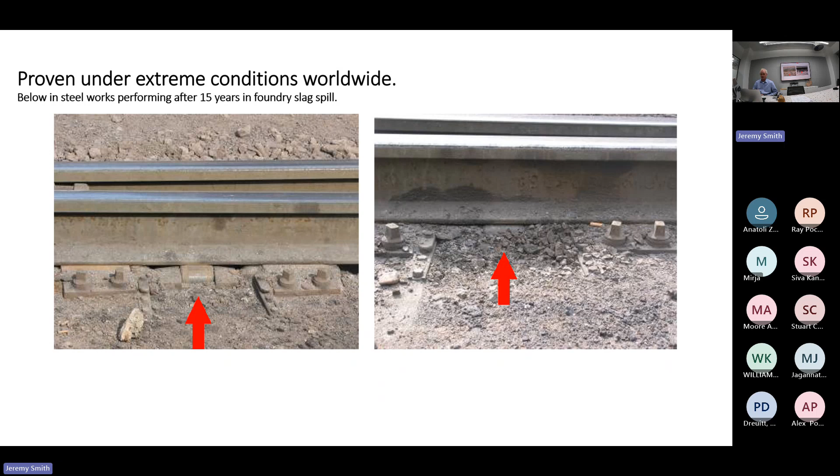That's enough of my blabbing for now. Any more questions?

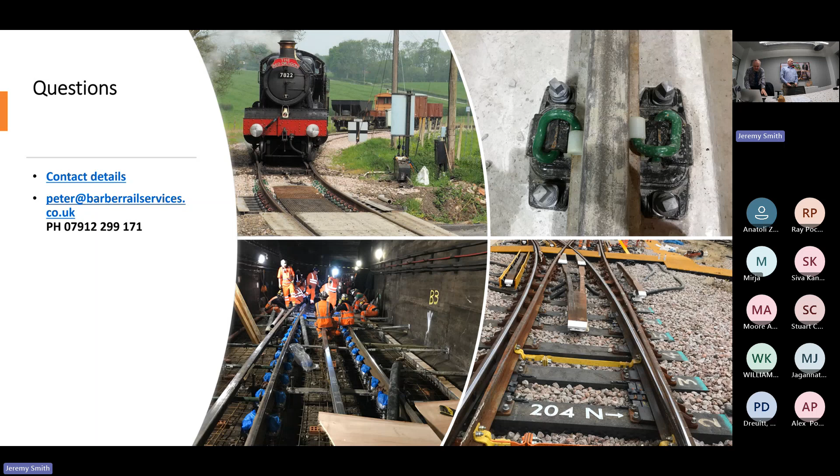The eggs—yeah, which I think they used to call Cologne eggs, Clouth eggs. So is that the origins of all these Delkor-based baseplates?

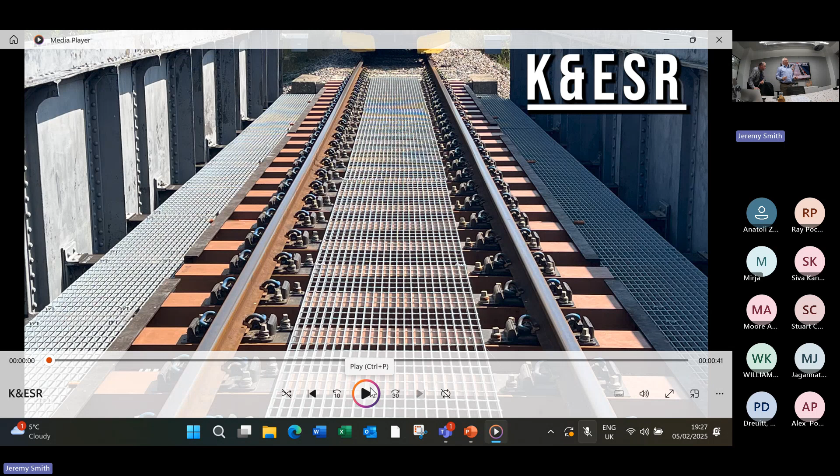Yeah, the origins of this were that the Clouth eggs were made, and then Vossloh bought them out, effectively to kill the market. In a bundle of stuff, Vossloh sold off a load of assets for Asia, and in that was the Clouth egg. The guy, Peter Stromstein, who bought this, said, 'I can sell it in Asia.' So he then adapted it, because he was into rubber—heavy media separation, rubber belts, etc. industry—and then modified it for the Australian market. It took off there, then it spread everywhere, and then it sort of came back. But it couldn't come into Europe because it was controlled by contracts, so Europe was excluded from that—it was still under Vossloh. It wasn't until a few years ago, when it got onto LU, that the contract actually ran its time and was broken.

I have a question about the Edilon slab—is it per metre length? What is it, heavier than ballast and concrete sleepers? Yeah, it is, because it's solid concrete. You're looking at probably about a metre of track being about a ton and three-quarters. But your ground pressure is reduced because you've got continuous coverage.

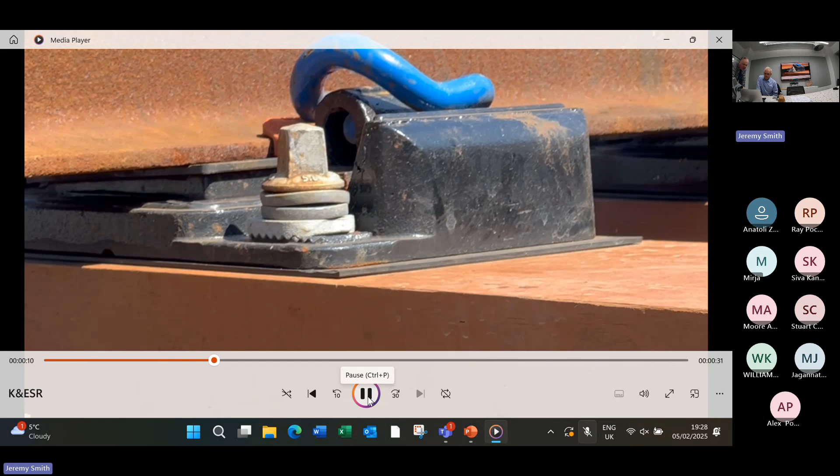Right, this is FFUs. This is showing how the resilient platform works. You can see that's a class 33, I think 18 tonnes. And this is in slow motion.

I'll show you the spider on the side when we show it again—the spider doesn't even get rattled off there. You can see the spider's just going down the side now, then come back up again—it's not rattled off, that's the sort of thing. If you look carefully, you can see the lateral movement as well, but effectively you've probably got more deflection there than you have on the secondary suspension on the train. And this is one of Graham Besant's.

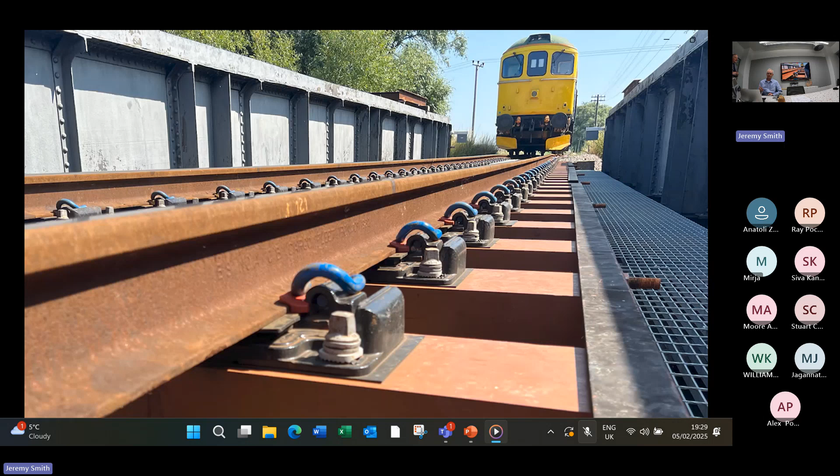Sounds about good. You can see, because there's no preload on there, and no fatigue on the holding down. So you can see with that spider on the side, it's not - you'd expect it to run a mile, wouldn't it? That's very interesting. Yeah, so that's where we are with it. I think, well, I know I'm biased, probably.

We've done some, but they haven't been that scientific, because the problem I always get on noise sensitive areas is when people stop complaining, everybody's petrified to go back in there and do some measuring in case you haven't met your requirements.

But I know we put some in your bridge, Mr. Ebbott, Baker Street, Finchley Road. What's that bridge, R3, is it? Yeah, we did some modelling with Southampton on that, and we did show a reduction on that one. And that's FFUs you put in - short timbers, weren't they? That's it, short timbers between the cross bearers. And it was always a challenge for me, what were we going to do with that?